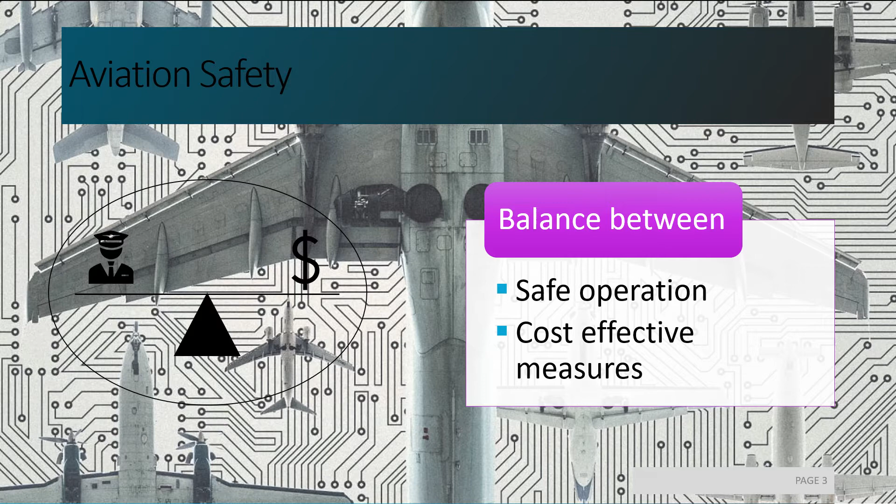There are several issues that should concern any passenger today. For one, computers are as fallible as the humans who manufacture and program them. False positives in analytical circuitry, either in the collection or the interpretation of information, will lead to incorrect responses from the logic gates in the decision circuitry.

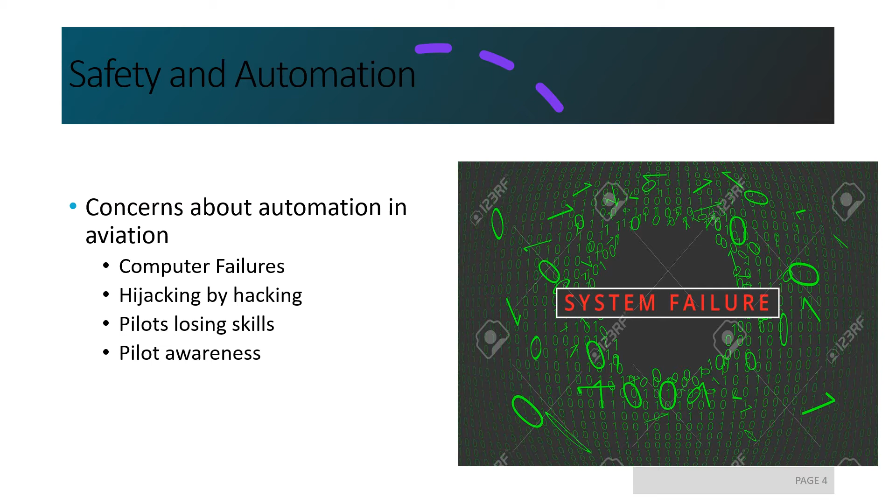Computers can also lose power or receive too much power from another component. For example, a faulty voltage regulator can take out a computer. Another concern should be that the computer can be hacked, someone taking control over the computer to hijack the plane.

Backup systems can alter the outcome of a single faulty computer, and the only successful attempt to hack an aircraft was done by the best IT technicians at the Department of Homeland Security. The aircraft had to be on the ground when it was done, and it didn't last for very long.

What should be of more concern are the mistakes made by the most fallible component in the cockpit. As of now, the backup for the computer is the pilot. However, the pilot has been dependent on automation for so long that they've lost the skills required to fly the plane. It has also caused a lack of situational awareness for the pilot. This is creating a very dangerous situation that is now the dominant cause of aviation accidents.

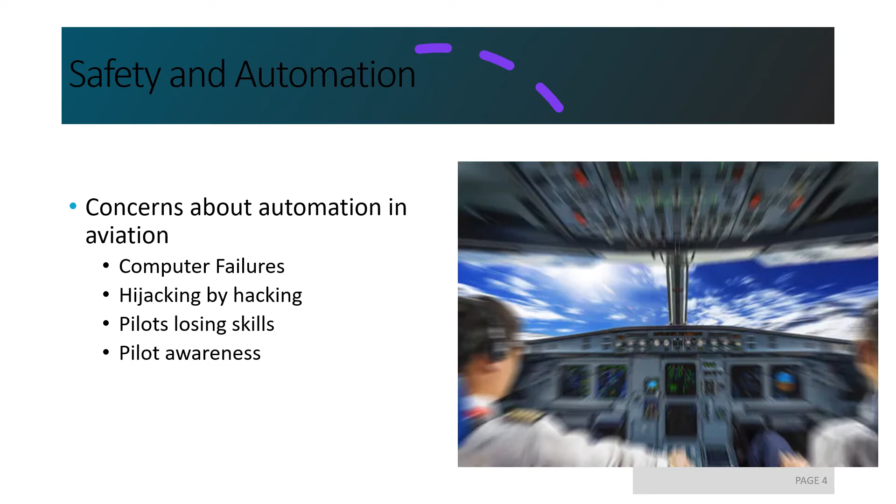Automation in aviation began with simple instrumentation like altitude and airspeed indicators, then developed side by side with the aircraft during the Second World War, where pilots made use of single axis controlling autopilots. In modern-day aircraft, computers not only control the attitude and position of the aircraft, but can also monitor all parameters during all phases of flight, making the most minute deviations to make the flight more efficient and economical.

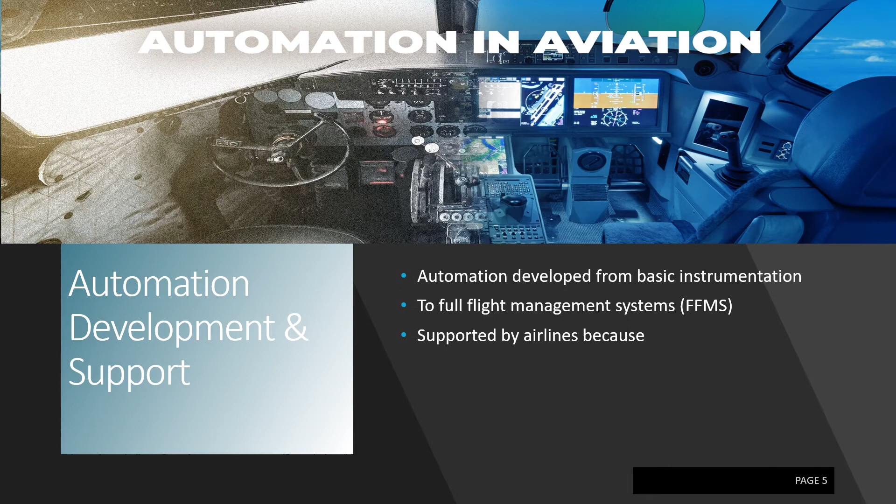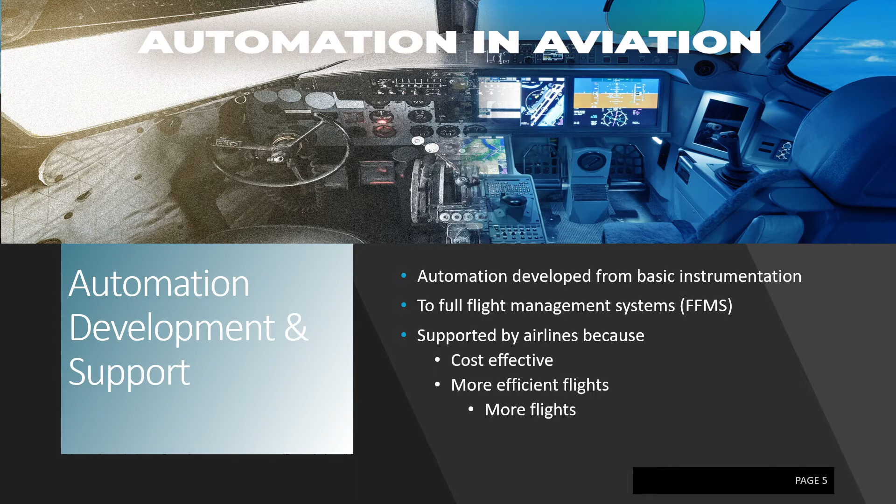Airline companies are looking hard at the potential for profit when the flight crew is no longer required. The number of revenue seats will increase, and the airline will probably charge more for front seat viewing of the flight. Airlines will be able to fly more aircraft per day at a much cheaper flight hour.

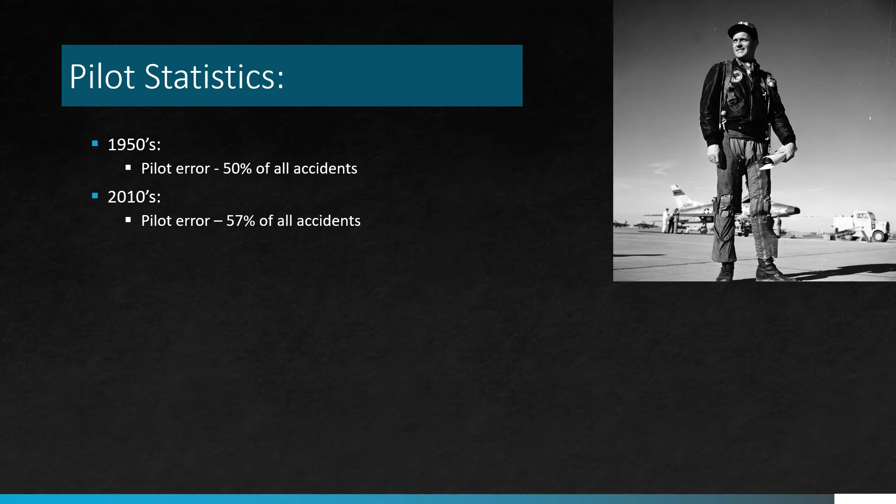In the beginnings of aviation, there were more mechanical failures. As the aircraft progressed through the years, improvements in design, materials, and technology have created a much more reliable aircraft. Mechanical failures decreased, however, human factor issues increased.

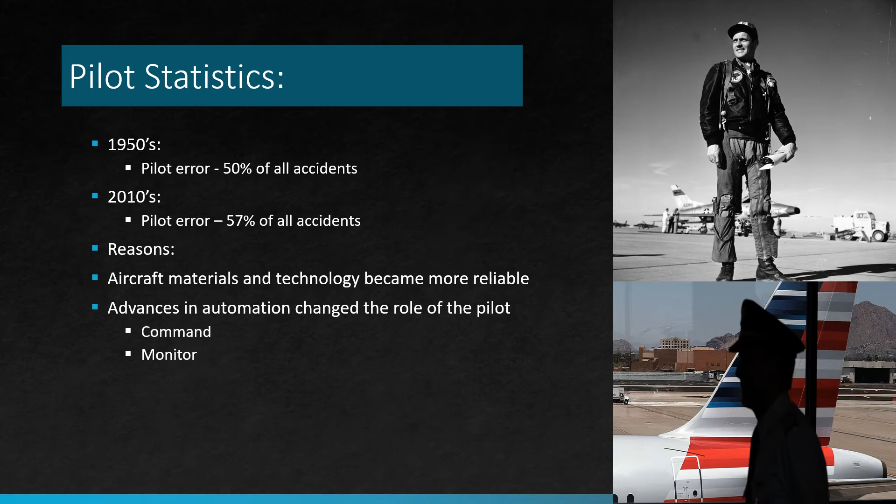The advances in technology have changed the active role of the pilot to a passive role, changing the pilot from someone who had command of the winds to someone who sits and watches the computer screen. As the pilot lost the will to pay attention and the skill to fly, human factor causation of accidents increased.

In the past, the flight crew consisted of a pilot, a co-pilot, and an engineer, with the possibility of a relief crew depending on the length of flight. Automation has been able to monitor aircraft and its systems with enough accuracy and reliability that the engineer is no longer required by the regulating agency.

Manufacturers have taken advantage of this space by removing the station in modern aircraft and saving the weight. Airlines took advantage and bought the modern aircraft and laid off all the engineers, except for those few air cargo outfits that still fly equipment like the 727 cargo conversion aircraft.

At the present time, the FAA requires a pilot and a co-pilot for transport category aircraft to relieve each other of duties and share the flight load. Automation also shares that load and is engineered to be more reliable than ever before.

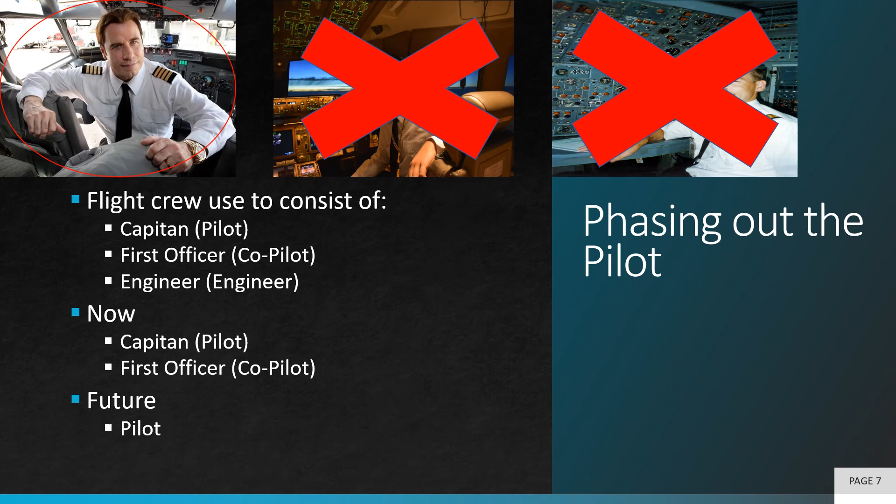Both Boeing and Airbus have the technology for a completely autonomous aircraft and are in the process of proving to the regulatory body that the first officer is no longer necessary. Then they will either get laid off or promoted to a primary pilot position. In the near future, this will bring about a single pilot environment, and then the pilot's future will be in question.

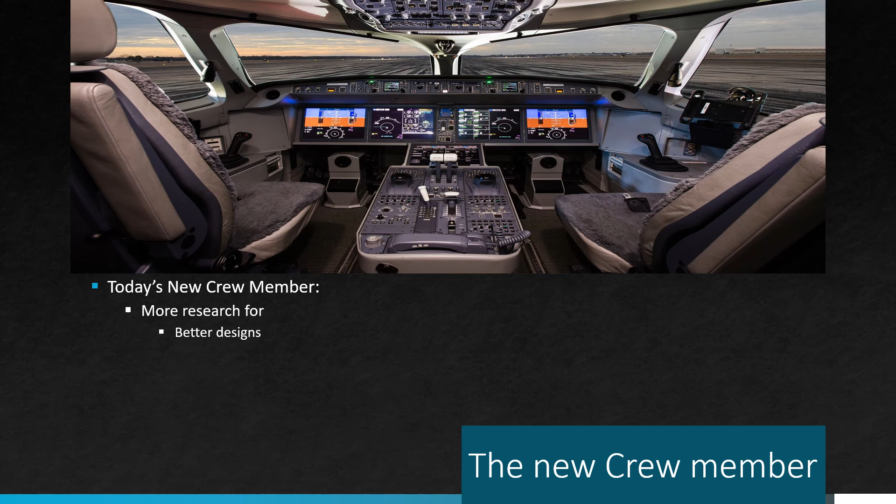The computer has to be accepted as a valuable crew member. In order to make that happen, more research into the design of computers that will keep the pilot's attention with a better interface system that will maintain the pilot's attention will be required.

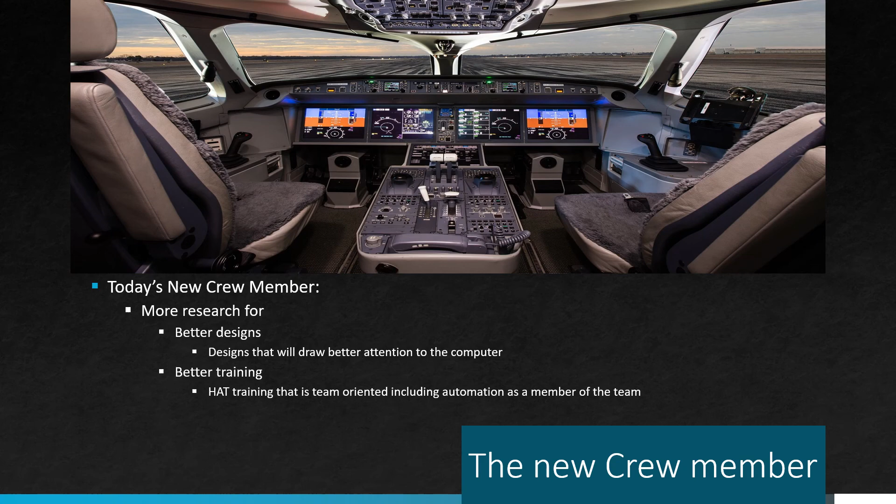Also, human factor training with an emphasis on HAT team training that includes onboard computers as one of the team members will also be required. In order to have a successful human-computer interface, the human in the equation will need a better understanding of the new crew member and learn to use it as it was intended, as a resource for the pilot, not an enemy of the pilot.

Passengers are not ready to get on board an aircraft that does not have a human in control, even if he only appears to be in control. A pilot will be able to read a situation and think of a solution that may be outside the computer's ability to improvise. The pilot is the one who puts his life on the line for safety and the future of the aerospace industry. It would be a mistake to fly without them.